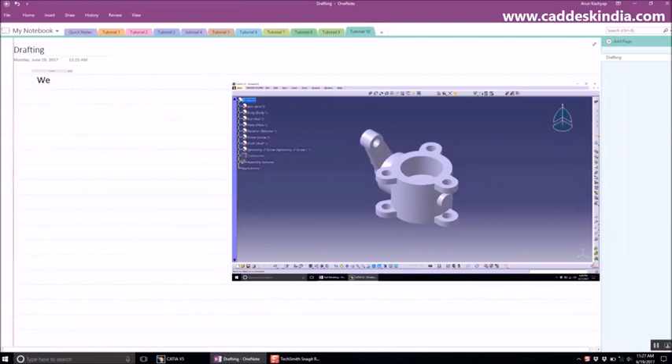Tutorial 10 with the drafting workbench in CATIA V5. Welcome back. In this tutorial we will draft the cat.product file extension, which is used for assembly in CATIA, so we'll discuss it today.

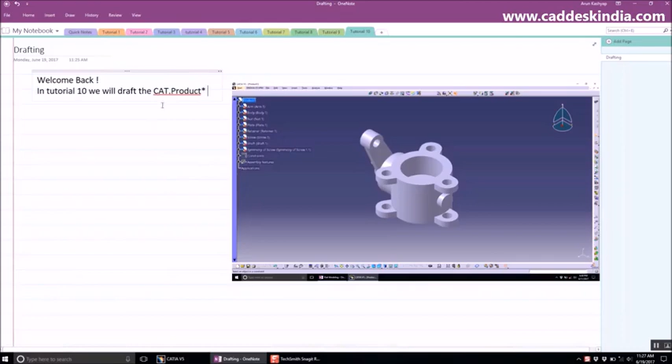We'll look at how drafting is done with the butterfly valve assembly file, the same project we used in the assembly and parts modules, and today we'll see the following commands. Our first command is sheet size.

We will set the sheet size, then do the sheet background, and modify the sheet background as needed. Then we'll discuss the title block, the sheet background, and next the sheet properties.

We'll set the properties of the sheet, like the name and scale of the sheet, and then show the angle projection. We'll set first angle projection or third angle projection.

Then we will see isometric view creation, front view creation, and projected view creation, like right view, left view, and top views. Then we will cover the bill of material, making a table for this assembly, and finally export this drafting file into PDF.

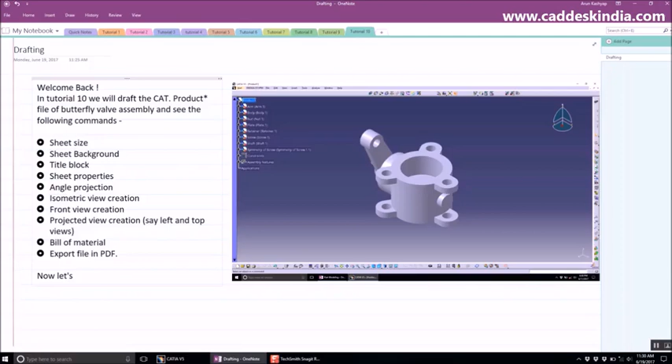Now let's launch CATIA V5 and see these commands one by one in the butterfly valve assembly.

Let's go to CATIA, click on Start, Mechanical Design, and click on Drafting. Here is the new drawing definition file. We'll select the standard to be ISO and the sheet size, which is our first topic so we can set it at the very beginning. I'm selecting A2 and pressing OK. So here we are on an A2 sheet.

Now let's open the butterfly valve assembly, because we can draft any model if it is already open. Go to Window, go to Drawing Window.

Now the next thing is to set the sheet background, so we'll switch to sheet background by clicking on Edit and Sheet Background. Here we are on the sheet background, and we can modify it. Let me close this.

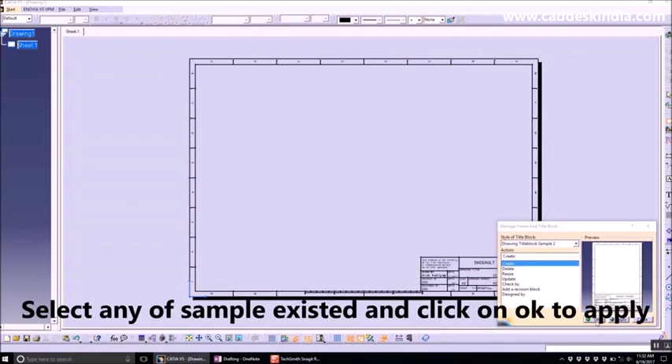The first thing to cover is the frame and title block. We can create the title block. Let's say I'll take sample 2, or sample ENOVIA sample 2, and apply this. As you can see on the screen, the title block has automatically been created.

We can modify or change anything. Our next topic was to create the title block, which has already been created. Now we can change the name or anything in it. As you saw, we defined this title block from here. Let's update this - it's already updated. Let's click the OK button.

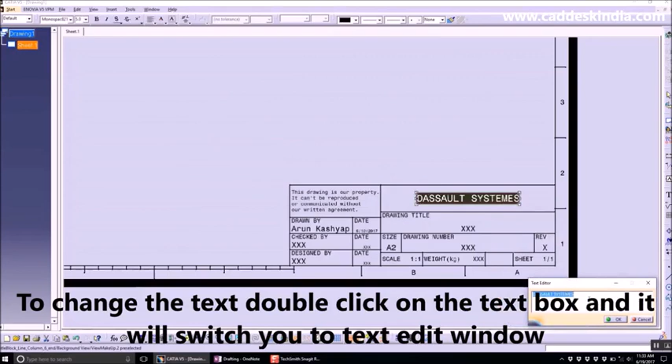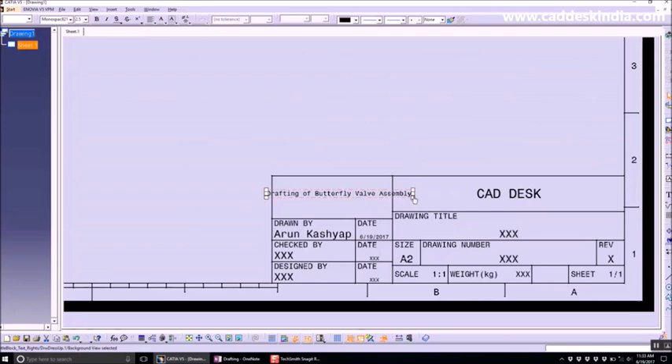Just double click on any of the text boxes and you can modify the text. Let me draw this, let me modify this to say 'Drafting of butterfly valve assembly.' Press the OK button and the text is modified. We can also adjust the dimension of this text box.

We can shift it anywhere, so you've seen it's very normal to modify the text of this title block. Now let's switch back to working views and go to the next topic, which is sheet properties.

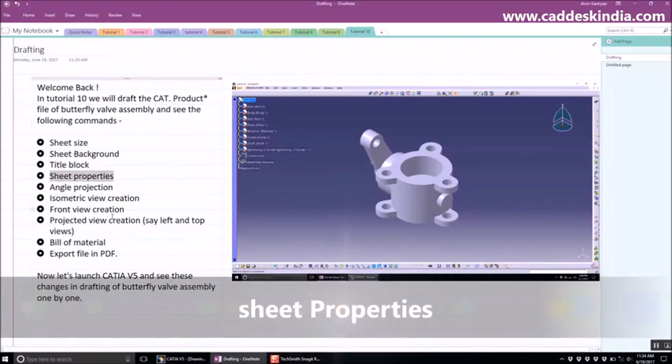We will set the sheet properties like scale and size. Go to Properties by right-clicking on the sheet. First, we can give the name of the sheet, let's say 'sheet for butterfly valve assembly,' and we can also change the scale for the sheet.

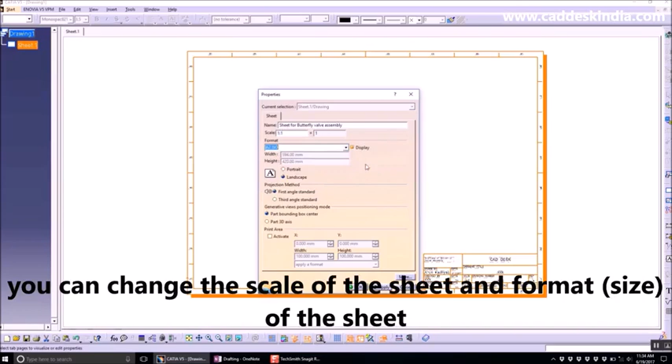We can change the format or size for the sheet - A2, A3, A4, A0, A1. So let's switch to A2, and we can also change the layout, like portrait and landscape.

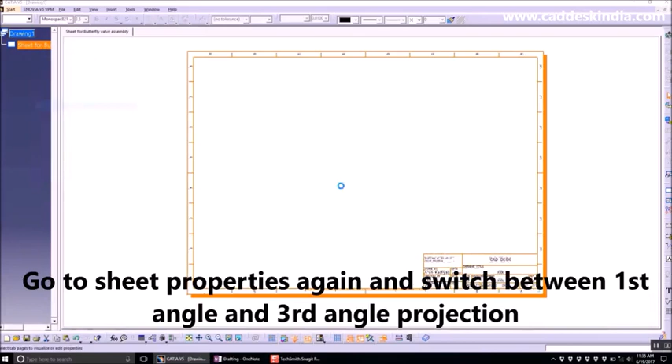The next command is to cover the angle projection - first angle projection or third angle projection. We can switch between them by going to third angle standard or first angle standard. I would like to switch to the first angle projection.

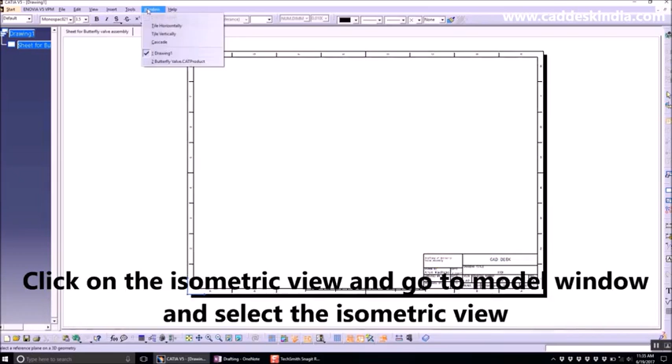Next is isometric view creation, which creates the isometric view of any model. Click on the isometric view creation, go to window, go to the model, and switch to the view which I want to draft. Just click on this, click on the sheet anywhere, and this is our isometric view created.

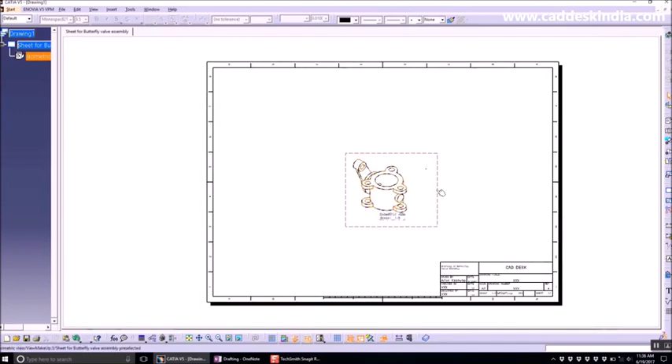Now right click on this, go to properties and scale it up to 1:5, and press OK button. So this is our isometric view created on a scale of 1:5, which is appropriate for our sheet size.

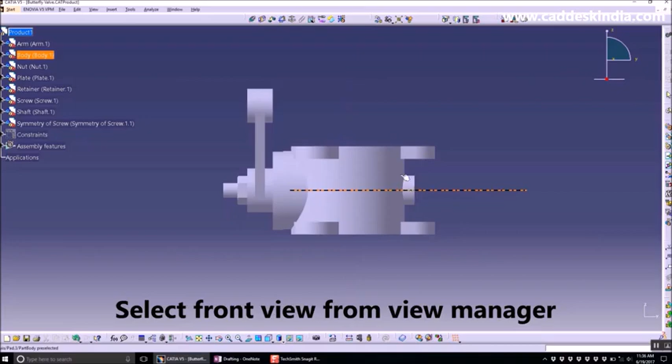Now next thing to cover is our front view. So again go to Windows and switch to front view. Let me change the view orientation and switch to the first front view. Click on the seat anywhere, go to properties, change the scale up to 1:5, and press apply and OK button. So this is our front view created.

Because we are running on a first angle projection, we'll be having the front view on the first quadrant. So this type we have created the isometric and front view.

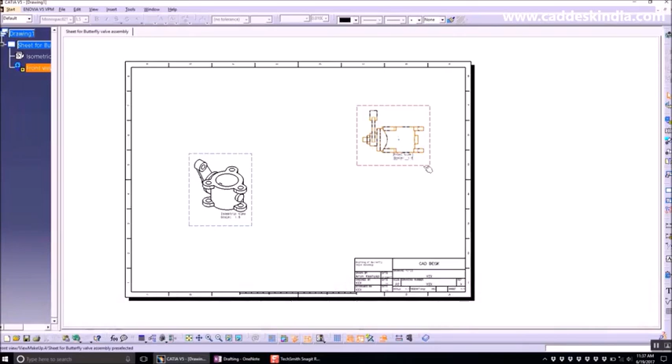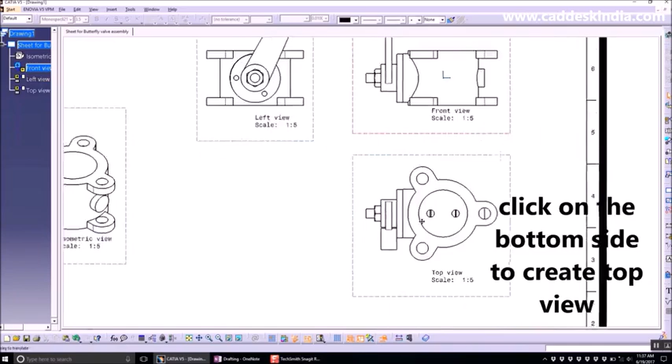Next thing is to create the projected view. We will be creating the top view just below the front view. Go to projection view, click on this front view, and click on the right side anywhere, which will create the left view of this front view. Click on the bottom side, which will create the top view of our front view model, since it is already an active view. Our front view was active, so that's why it created the left view and top view as it should be, so it looks better.

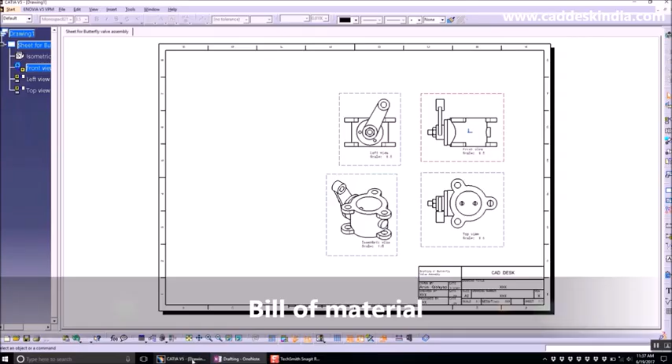Now next thing is to cover the bill of material. Let's go to model again by window, butterfly valve assembly. Let's switch back to isometric view, go to analyze, click on the bill of material, click on define formats and revision to be added on the list, press OK button. Now let's switch back to drawing window, go to insert, generate and bill of material, click on bill of material.

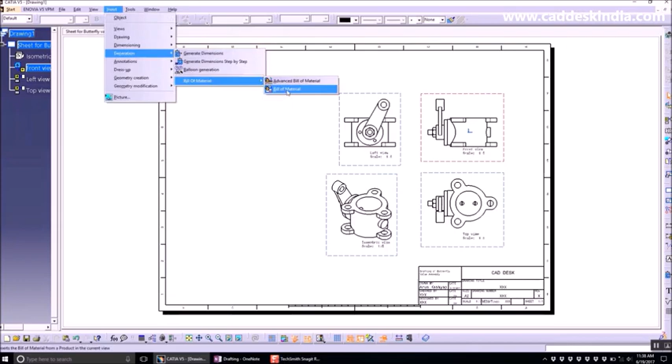Oops, our front view was the active view, so first thing to do is activate the isometric view by right clicking on it and activating it. Now again go to insert, generate and bill of material, and click anywhere on the screen. This is the bill of material generated.

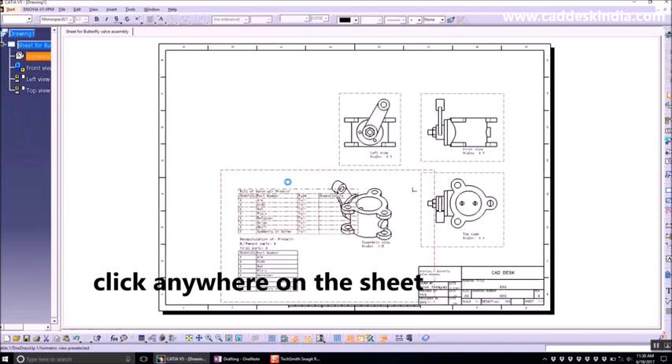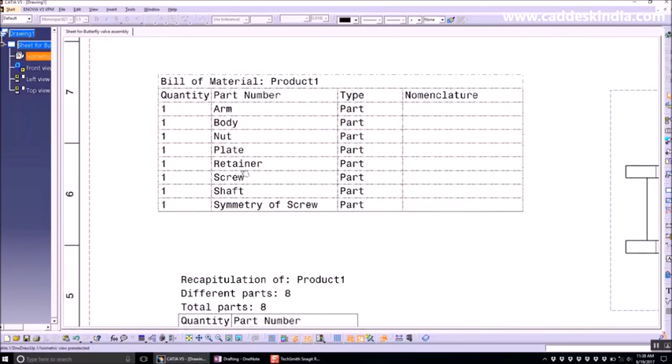These are the tables of bill of material, which contain all the information of number of parts, name of parts, type of parts - arm, body, nut, plate, retainer, screw and symmetry of screw. So these are all the things included in this drawing.

We can modify the extension for boundary of view and adjust it accordingly. So as you have seen, this way we can modify and add the bill of material on the drawing.

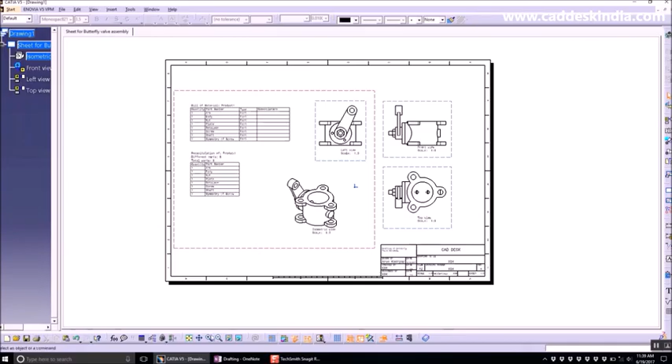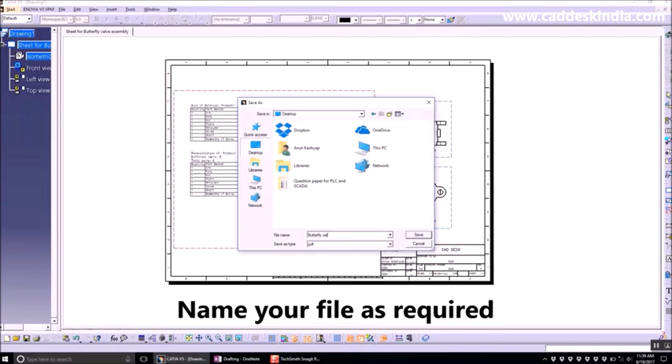Now next thing is to cover is to export this file into PDF format. This is nothing but just saving. How you are going to save your file: click on the save as button and change the format to save in .pdf portable document file, and name it as butterfly valve assembly. Let's save this. So this file will be saved into the PDF format.

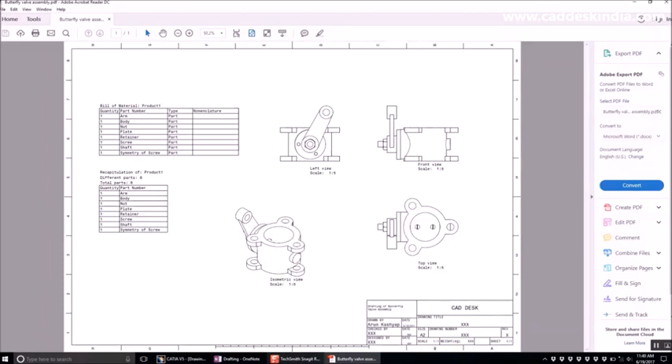Now let's go to desktop, and this is our file created. We can open this in the PDF reader. So this shows that we have created a PDF file. We can send it or publish it anywhere in the form of a portable document file.